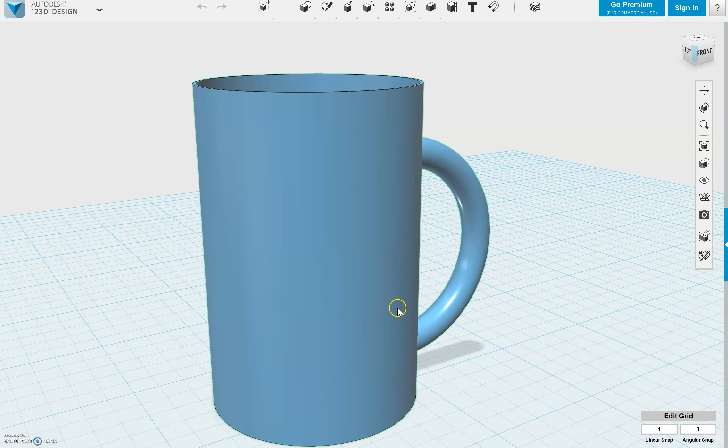So you've made yourself an object in 123D Design, and you want to 3D print it. First thing you need to do is make sure all the elements of the object are combined. You can do that by going to your Combine menu and selecting Merge.

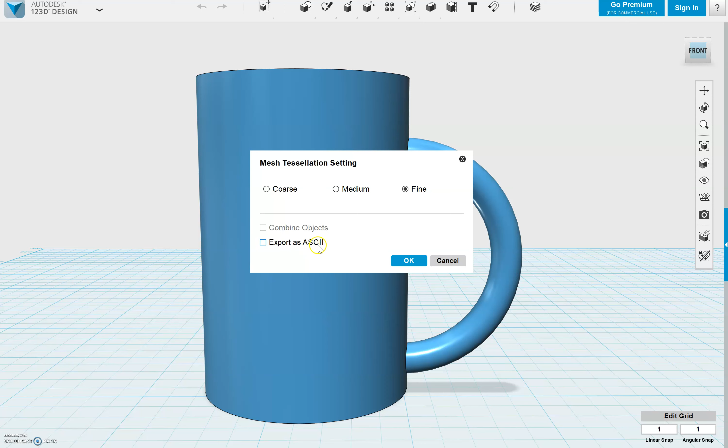Once you've merged everything, your next step is to save the item and export it as an STL. In 123D Design, you go to Export as 3D, then select STL file. For mesh tessellation settings, go with fine for better results. We're not going to export as ASCII, and we click OK.

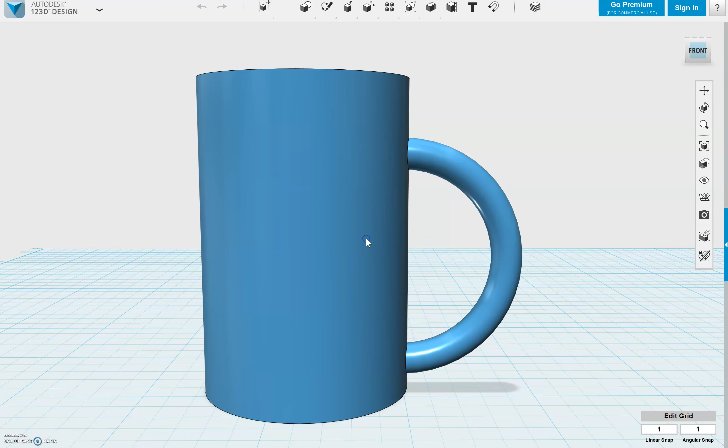We're going to call this our mug, and save it to our USB drive. So once again, export as 3D, STL, and then save it. Once you've done that, you can exit out of 123D Design and open up your slicing program. In this case, I'm using Craftware.

From here, we click on Open. There's a little green button here. I'm going to browse to where I've saved my STL file, and find any files in this case. Here we go, here's my mug, and I'm going to open it up. It wasn't showing up because it was just listed as Craftware project files, so I open up my mug.

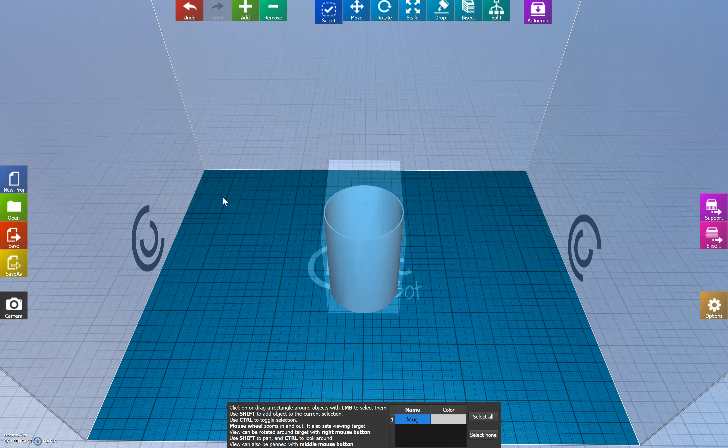Ooh, there we go, that's looking pretty good. It's flat on the build plate. It's not looking like I want to reorient it in any way, meaning I'm not going to put it on its side or scale it or anything like that. So I'm just going to leave this exactly as is.

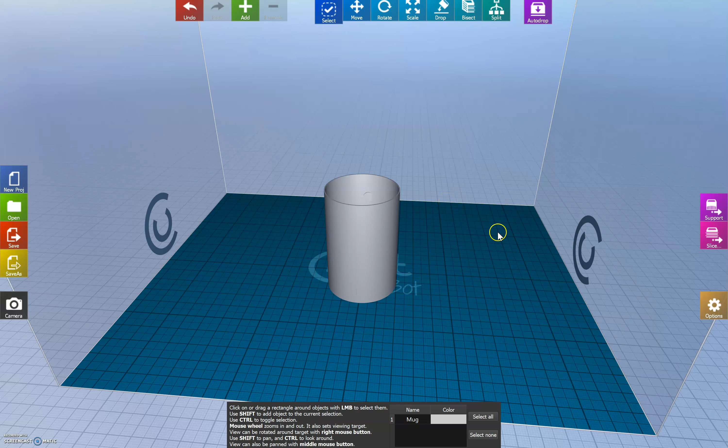If I need to mess with it, you'd click on it and then you could scale it using these buttons down here. You could also click and drag to scale it if you want to. But that's not something we need to worry about with this particular thing.

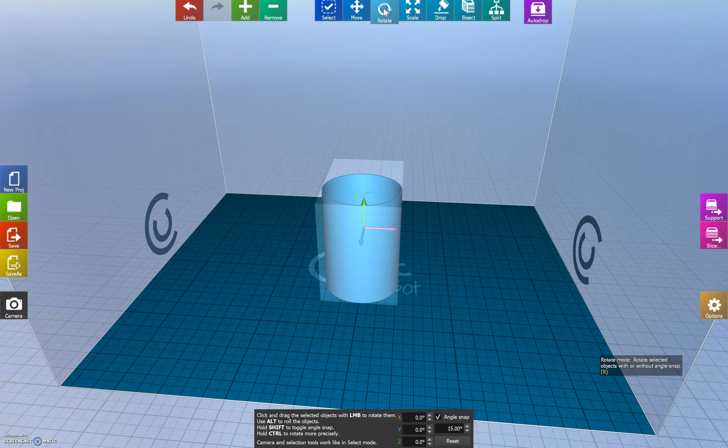You can also rotate the object. This gives us 3 axes to rotate it around if I want to, or you can simply move it around on the build plate if you want to put multiple objects on it. So you've got several options here, but in this case we don't need to do any of those.

So all we need to do here is go right to slicing, which is on the right-hand side. It's this light purple button labeled Slice. Now, before that, if you haven't gone in and set the size of your bed, that's very important. You need to make sure all your settings are correct before you slice, and that's going to be printer specific.

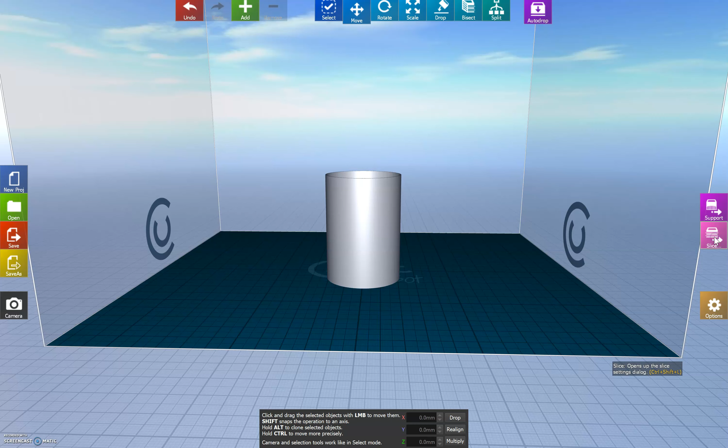Okay, so after this, we go to Slice. We select our material, our print quality, nozzle size. You can select your build plate if it's got some sort of covering on it, type of hot end, and if you've got presets, you can load them here - that's stuff you've already saved, like preferences for bed and stuff like that.

This is where you get things like, what is my heated bed going to be at, what's the head temperature of my extruder going to be at, and so forth. Do I want to heat everything up simultaneously, or heat the bed first and then the extruder? This disables the fan on the first 3 layers, which helps you get better adhesion. I recommend that - it's very helpful most of the time.

Speed, this is how fast you want it to go. If you're having trouble laying the print down with accuracy, you can lower your speed. And then you've got all these other settings - these are just basic settings. You can go to the advanced settings and get really crazy, but for the sake of this basic tutorial, just leave this stuff alone.

I like to stick with high or medium quality the first time I print something. So I'm going to stick with high quality on this one, and I'm just going to click Slice. And there you have it - it didn't take long because it's a very simple object.

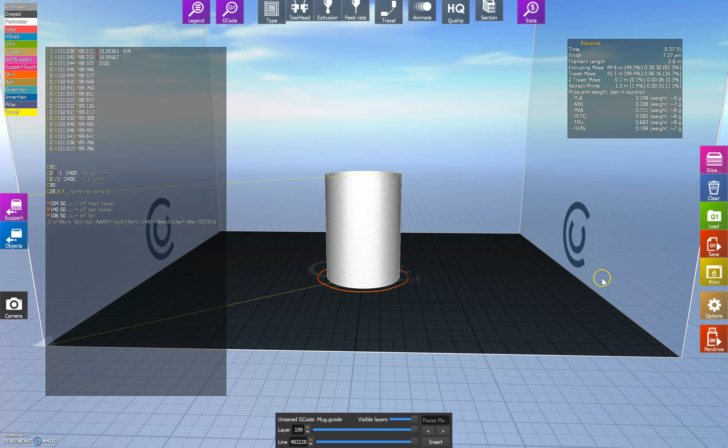If we twist around, you can see where it's added the supports necessary for printing the handle for the cup. This thing is done. Now all I have to do is save my G-code, save G1.

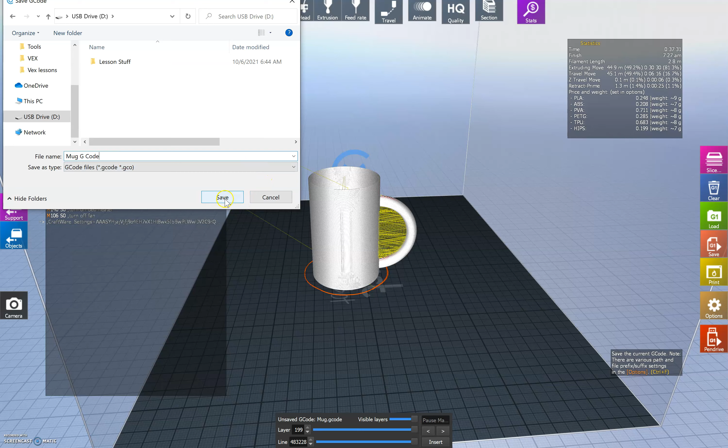I'm going to save it to the same place - oh look, I was making something for my Yamaha. We're going to go to the flash drive here, and we're going to save this as mug G-code. Voila, and there you have it. G-code is saved. Make sure to completely safely remove your pen drive.

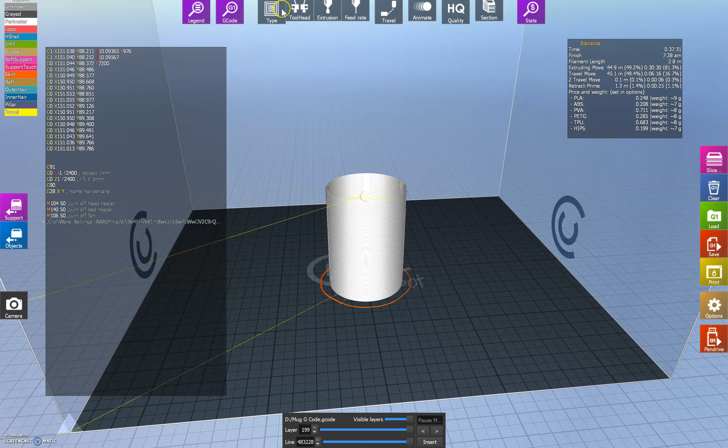And there you have it. So once again, real fast, how we do this - let's take it back to the start, shall we? We're going to click on this guy, go back to a new object here, go to Objects, here we are. I'm just going to click on this and delete it.

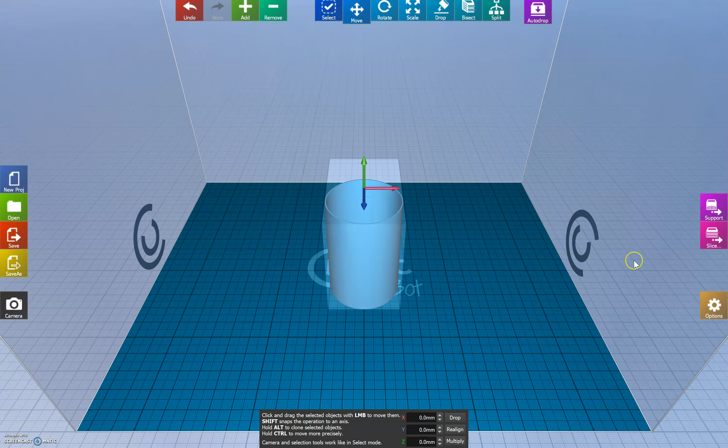So once again, to do this, we open, we go to our item, we make sure that we're showing all files, we select our mug, and then we go to slice. If we're a beginner, we leave all these settings alone and we just select medium or high quality and then click slice, and it takes care of everything for us.

And that, my friends, is how you take something from 123D design through a slicer, and then it's ready to print on your 3D printer. And there you have it.